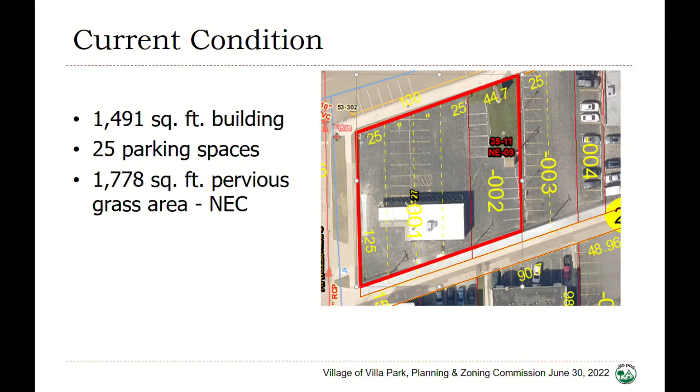When a project comes in, I look at the code and I see what the requirement is. In this instance, it's an MXT zoning district. Then I've got what's proposed for the project, some notes, and then whether or not it met the code or a variance is needed. So the project does meet all of the elements on this page: the minimum build-to frontage, the build-to zone, which is how close the building is to the property line, at the front, at the corner. It meets the side yard, the rear yard, and the building width requirements of the code.

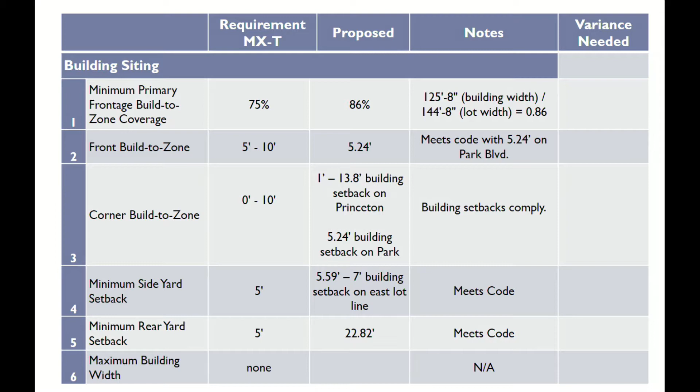It does not meet the impervious lot coverage. It does not meet the garage entrance, but it does meet surface parking, and the driveway access location is not applicable because there's not a surface lot coming off the main street.

The height is met in the code. 2 to 5 story is permitted in this district, and he's proposing 4. He has stepped back the 4th floor to comply with the code, and each story meets the height requirements of the code.

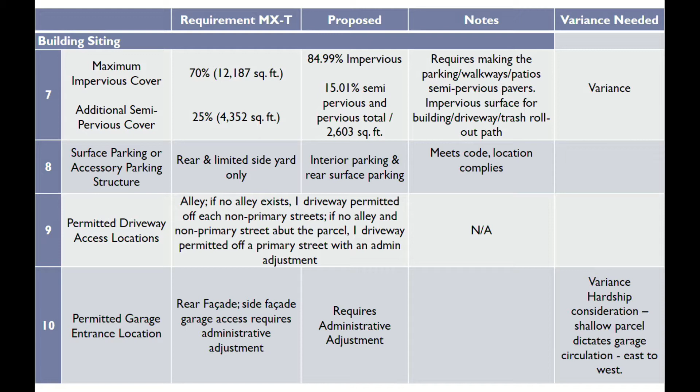The commission has discussed the use. It is within permitted uses in the district. The parking's in the building. And the depth of the first floor meets the code.

All of these elements meet the code. The transparency, the blank wall, that's blank in the rear, but that's not a primary street. The number of doors, the configuration of the doors, and some of the architectural elements meet the code.

This one does not meet the code. This is a requirement in the form-based districts of the code. Form-based zoning means we're looking at the form of the building and how it approaches the street more than we look at the use within the building. And the code requires a 13-foot minimum streetscape, and in this instance, it's always measured from the curb. In this instance, the village has moved the curb back 13 feet to create those parking spaces. So there is a hardship staff felt, and a variance of 4 feet is required.

Parking is something that needs a variance. The design of the stalls - this relates to when you come in from the alley, the width of that aisle is not 24, it's at 22. The landscaping I've referenced, the foundation landscaping.

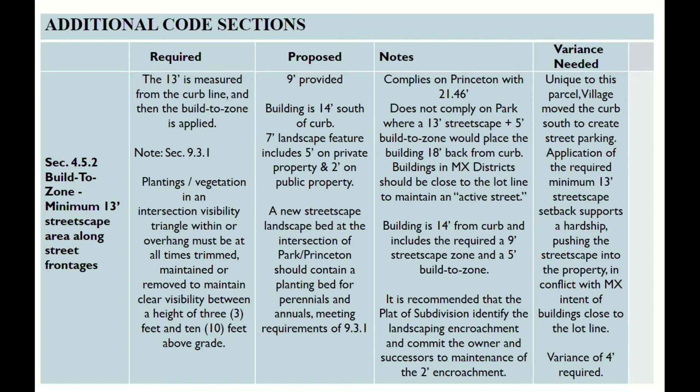And then when we get to this part, I've got the motions to put them up on the board for the convenience of our residents to see. But for right now, I'm going to let Mr. Ross give his presentation.

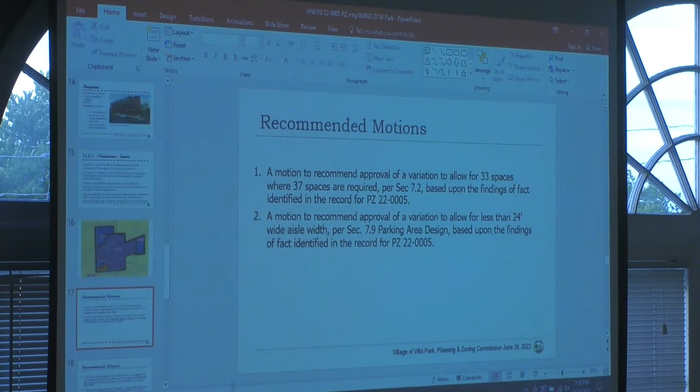I'm Craig Ross with Ross Builders. Thanks, Ellen. Thanks, commissioners. Thanks, community, for coming out. I'm going to go over the changes that we made since our last meeting, so I'll keep it fairly brief.

The first thing we did was set back the fourth floor on the west elevation by 9.5 feet. This did two things - one, eliminated one of the bedrooms, and two, makes that side a little bit softer. I think Commissioner Ludke had this recommendation, just makes it a little bit softer on that west side.

The second thing we did was revise the exterior alley parking. We changed it to perpendicular. This was the staff recommendation and a bunch of the departments. By doing this, we were able to add a stall, so that increased the parking in the alley from 10 to 11. It also increased the buffer between the alley and the rear of the parking stalls - it used to be 4, now it's 6.82. And it also allowed us to widen the parking stalls from 9 feet to 9.5 feet.

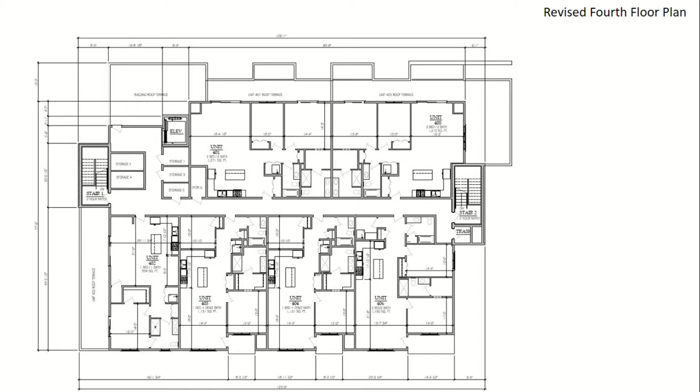This is the fourth floor. This is really the only floor plan that changed. In the lower left-hand corner, behind the stairwell, you can see that there's no longer building there - that's a rooftop terrace. And that unit in the lower left was changed from a 2-bedroom to 1-bedroom to make it smaller, and again, to push that back 9.5 feet.

This is the front elevation. Nothing you could really tell from here that's changed. This is the west elevation.

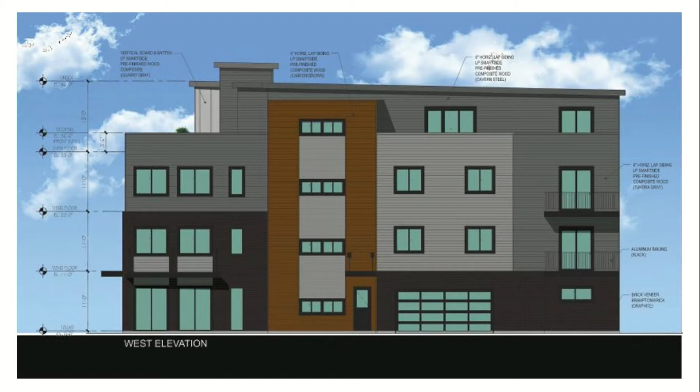So I have a 3D coming up later, it'll be more apparent, but on this 2D, you can see that the brown area, that's that stairwell. And if you look to the right of that, that light gray area above that used to be all flush, used to be 4 stories, but now the darker gray behind it is set back 9.5 feet.

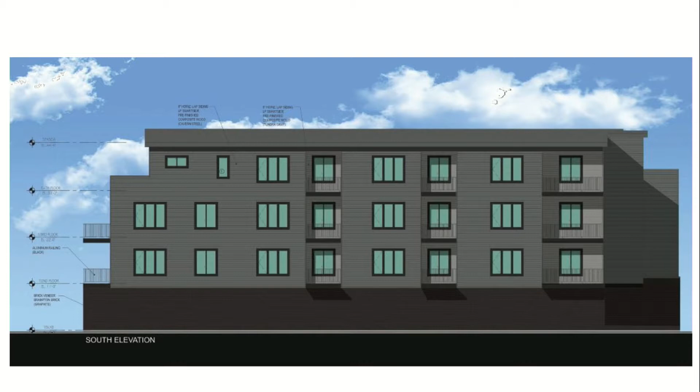East elevation hasn't changed. This is the south elevation. So again, if you look in the upper left-hand corner, again, this is a 2D - the stairwell would be where the cloud is, so to speak, but it'd be 30 feet back. So we didn't show that stairwell, just so you can get an idea. If you were standing in the alley, it would look more like this, or even if you're standing farther back.

Now on the site plan, again, the major change here is going to be the parking in the rear. You'll notice now it's perpendicular to the building. You'll also notice we have 11 spaces instead of 10 spaces. It also helped with some of the impervious. We now have less impervious.

Those were the major changes on that, really the only changes. Well, actually, the one minor change in the upper left-hand corner, staff let us know that we do need an ADA parking space due to the number of spaces now in that area in front of us. So that island got a little bit smaller to accommodate the ADA space.

So these are the changes on the variance requests. Ellen went over most of this, but I just want to go over them more specifically since our last meeting. Again, we're still looking for a variance on the impervious, but now our request, right now we're at about 85% versus before when we were in here, it was about 87%. Again, most of this came from the revision of the alley. So in that corner where the ADA parking spot is, we were able to pick up some more green space.

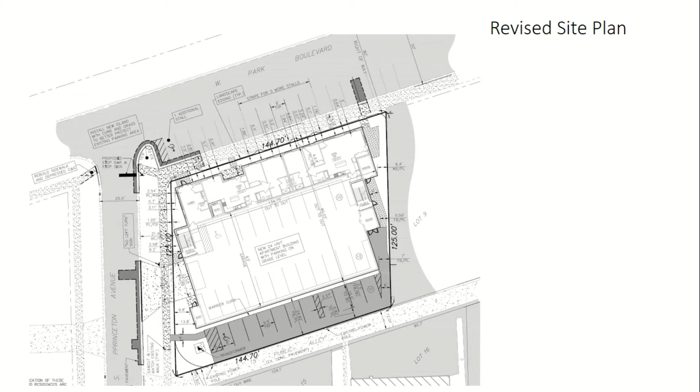So were there any other questions or comments where you'd like to address anything before we start asking additional questions up here? There didn't seem to be any new questions or new things brought up that we hadn't already addressed, so I don't want to go over that again.

The flooding issue was brought up a lot, and someone said we're going to make the area worse, but we are actually going to make it better. Again, we're not meeting the 70%, but we are going to have less impervious surface than is there now, and we are going to have permeable pavers that aren't there now.

It also seemed to be brought up that the number of units or stories would impact stormwater. But if it's a one-story building with the same footprint as a five-story building, the impact is identical. It's the footprint that impacts it, not the number of units or stories. But if there's a problem there now, which it sounds like there has been for 20 years, obviously whether we do this development or not, that should be addressed. We certainly wouldn't be making it worse—we should actually be making it better.

Yeah, and please show the applicant some respect, please.

So I'm going to ask—if that's all you have, then I'm going to... But there was one more. Oh, go ahead.

One more quick thing—someone said we didn't have permeable pavers, but we do. Someone mentioned how permeable pavers may or may not work. Obviously, when we're installing permeable pavers, they are spec'd out by the permeable paver company. They've gone through testing, so they know how much drainage they can have, and we need to install them according to design.

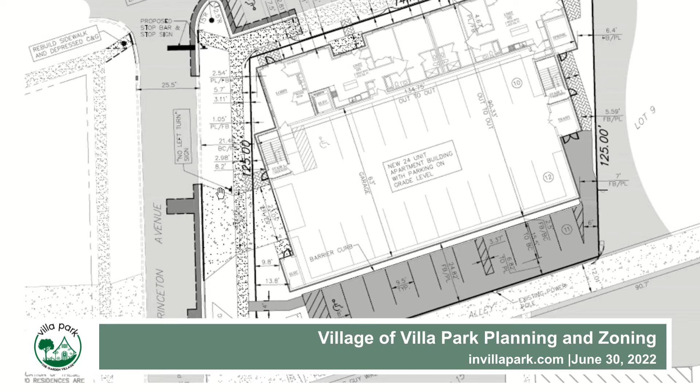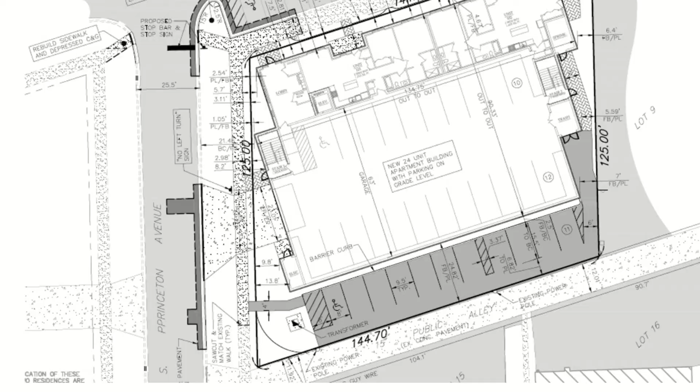Can you define the pork chop for us? When you look at the driveway, you can see how there's a triangular approach on either side - there's a driveway flare. If this southern triangle went away, cutting a triangle off, you've then flared the driveway, so when you come out you have to make a right-hand turn. You're essentially creating a right turn out, left turn in only situation. Staff does not have a strong opinion one way or the other on that.

Are we allowed to address that? We thought that was part of the plan already. No, sorry, you can't. Could you just state your name again so she gets it? It's Molly Marcz, M-A-R-C-Z. Yeah, the questions have been asked, and that's something we've asked of the petitioner, I'm sure.

I have a question for staff. Ellen, perhaps you'd be best to answer this. The two apartment complexes directly to the south of 27 West Park, are those Highland Avenue address buildings? I believe so, I would have to confirm that. They are. Do either of those buildings have a 5-foot rear foundation landscaping in what's considered the rear of their property lots? I don't believe that they do. Remember the code changed in 2018 where landscaping was required for the first time, and some of the other buildings built recently did not have the rear foundation. It's not required in districts where there's zero lot line buildings generally. Thank you.

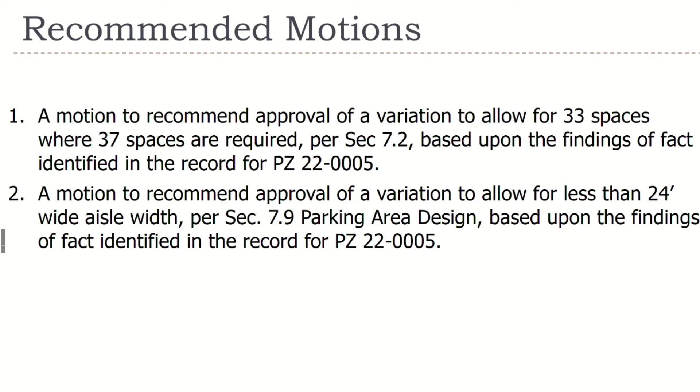Again, I would also say on that one, they actually had more—we asked them to turn it perpendicular. The village wanted them to turn perpendicular. That does change the geometry at the rear.

That's one I don't have any problem with, based on parking standards generally, in terms of they've added 9.5-foot stalls, which is also something I would mention in relation to the first one—with the 9.5-foot stalls, if they went to 9-foot stalls, they could almost squeeze another parking space in the rear. I don't know if you can, given the utility poles that are in place. And I believe that was mentioned by engineering, that the placement of the ADA stall does not allow it to be pushed to the west. But they are providing 9.5-foot stalls in the back to make sure the turning radius is, I would say, not just sufficient, more than sufficient. Anyone have any questions, comments on that?

Okay, so then we've got a motion to approve garage entry on the side yard, which is Princeton, where only rear entrance is permitted.

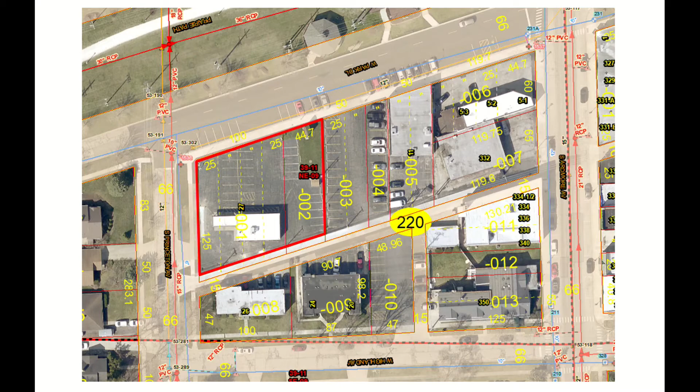If it was a surface lot, there could be limited side yard access to a parking lot. That's where the hardships are created to a certain degree by the code, because we do have a desire to not have that curb cut be on Park. I personally have strong opinions that curb cuts on Park are not good for Park, but certainly not a garage entrance.

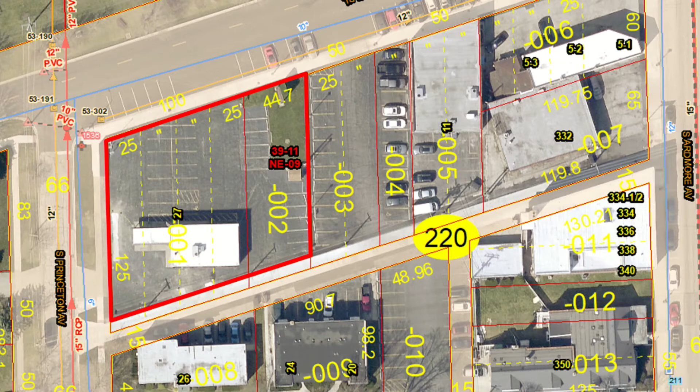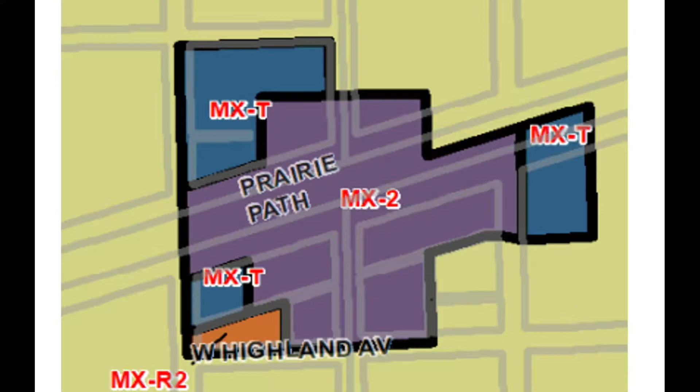Any questions, comments, thoughts on that? Okay, so a motion to approve 85% impervious lot coverage, and make sure these numbers are right. 2.5% semi-pervious lot coverage, where a maximum impervious coverage of 70% and an additional semi-pervious cover of 25% is allowed.

Mr. Chairman, may I? I'll put the motions up here. Remember, they're motions to recommend approval by the village board. It's not a motion to approve, it's a motion to recommend approval. When we go to the actual motions, I'll make sure we get all the proper language in there.

On this one, I think there's going to be some questions, debate. I know at the previous meeting the applicant said they would try to get pervious, semi-pervious pavers where they could, but there were concerns about maintenance in parking areas due to the combination of wear and tear from road salt, freeze-thaw winter cycles, and the weight of vehicles over time.

Again, toward the spirit of the ordinance, I'd point out that they're adding approximately 5% of pervious surface, either at the site perimeter in areas that are currently asphalt, or the landscape island at the northwest corner. So while they may not be there, they're actually reducing the total impervious surface across the entire project area more than that number alone would point to.

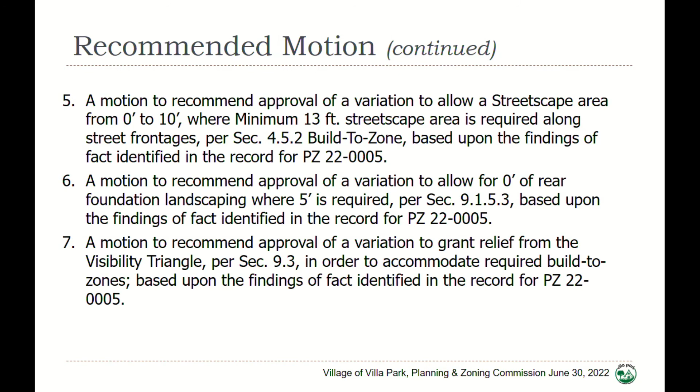Item 6, that's the one we determined we didn't need. Correct. Item 7, a motion to recommend approval of a variation to grant relief from the visibility triangle per section 9.3, in order to accommodate required build-to zones, based upon the findings of fact identified in the record of PZ 22-0005. Motion from Schlinsky, seconded by Ledke.

Roll call: Calvert, Yes. Case, Yes. Ledke, Yes. Romano, Yes. Schlinsky, Yes. I too vote yes.

So with that, our recommendation passes to the village board. We are not the final decision makers. They can accept, reject, or modify the motions as they see fit. There will not be formal notice sent regarding that as there was for this public hearing, but the agendas will be published, so keep your eyes on the agendas.

With that, I would entertain a motion to close the public hearing. We have a motion to close the public hearing, made by Romano, seconded by Calvert. All in favor? Aye. Okay, so the public hearing is closed.

Mr. Chairman, can I make a clarification for the record? Just so the audience knows, the vote today was with respect to the parking space variance and the impervious lot coverage variance. That was a denial because it failed to receive a majority of the zoning board. So the recommendation to the village board will be a denial of those variances. The other zoning variations, with respect to the less-than-24-foot-wide aisle, garage entry on the side yard, streetscape area from 0 foot to 10 feet, and relief from the visibility triangle, those have been recommended for approval. So those are the recommendations as will be advanced to the village board.